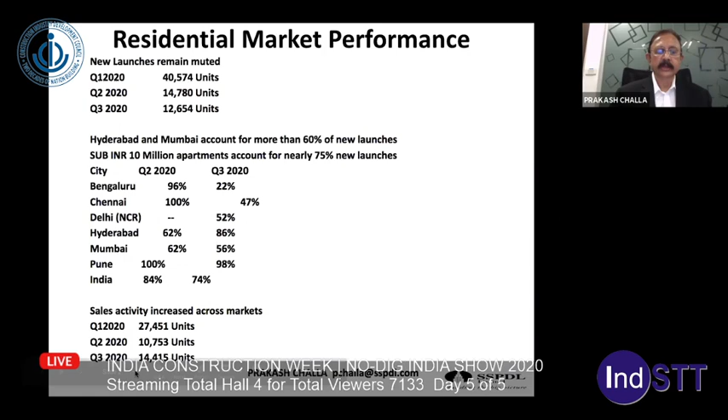The entire real estate space in the country has moved on from the office market, generating a lot of jobs. So when you look at Q1 of 2020, it was around 8.62 million square foot which got absorbed. Q2 was a dampener because just then the entire lockdown was introduced, and subsequently Q3 has picked up and it has more or less given a 64% growth rate, which is very interesting.

Now, at the same time, there's a lot of pre-commitment which happened during that period. The pre-commitment was largely to clients in Bengaluru and Hyderabad. Hyderabad is a new place which has completely overtaken the other southern states, and it is inching to the number one position next to Bengaluru. It is very likely to cross over in terms of infrastructure.

Hyderabad is doing superb in the way the entire government has taken it to a different level there. So this is the basic industry where you have a lot of commitments and a lot of pre-commitments going on.

And parallelly, the entire commercial real estate space is also taking a lot of changes now because the work from home rule has come in, with several IT companies now re-imagining their own requirements of office space. But as the latest survey shows, the way the entire markets have revived, they see this as a very short-term measure. Eventually, people need to come back to the offices because of the way it is growing.

Therefore, in today's scenario, CIDC is doing a commendable job by organizing this kind of discussion so that the industry at all levels, the academia, and the government agencies should come forward to find a genuine solution. We would like to discuss what has happened in the last 9 months, what is the impact assessment, and what should be the probable recommendations to come out of it.

As you know, the construction industry in India is the second largest employer after agriculture. It is critical to the country's economic stability and accounts for 8% of the national GDP, employing almost 57.5 million people. Being a core sector, there are numerous industries dependent on construction, which almost contributes 60% of the total investment that takes place in India. That is the reality and the impact on the overall economic scenario in our country. We are a major stakeholder in the national growth.

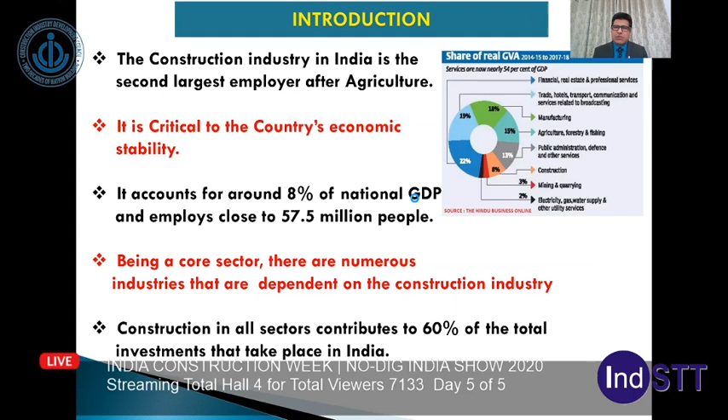As per a KPMG report I found online, roads and bridges, urban infrastructure, railways, and irrigation sectors accounted for more than 64% of the investment from 2008 to 2019. The construction sector, both development and infrastructure, in India was the second largest recipient of FDI, almost 10%, from 2000 to 2019, despite being fragmented.

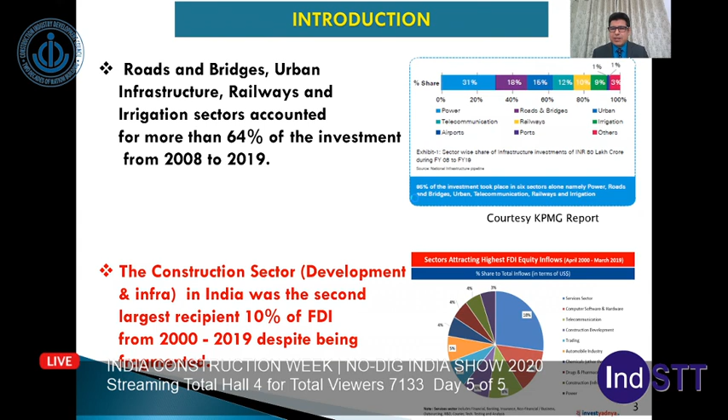So what could be the effect? We are already experiencing these effects of this pandemic on our construction industry. It is expected to face a simultaneous effect on both supply and demand. As the sector is driven largely by infrastructure projects, it is expected to be hit severely by current levels of uncertainty, dismal business and consumer sentiments, loss of income, as well as diversion of government funds towards COVID-19 management. So the next 2 to 3 financial years, as per me, is going to affect this industry significantly.

Low economic activity in other sectors would impact construction services through forward linkages. These are the sectors that feed into construction - chemicals, agriculture, non-metallic products, trade, metal products - and their contribution shows how it is going to affect us, as shown on the slide.

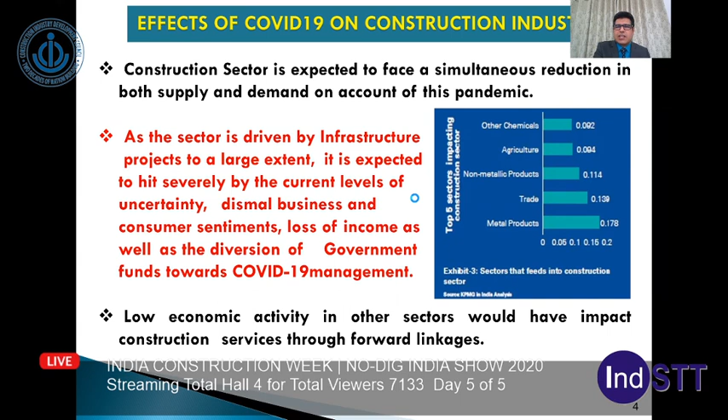A fall in output of construction would have a multiplier effect. It is a force multiplier, a multiplier effect through backward linkage, causing further shrinking of overall economic activity.

This pandemic is expected to hit labor-intensive sectors particularly hard. In the construction industry alone, migrant workers comprise a large part of the workforce and typically stay at the construction site. We all know what happened in April and May, when mass migration took place from the workplace to their native places.

It was a very horrific scene and incident that had taken place at that time. The lockdown imposed due to COVID-19, and its extension from time to time, led to reverse migration of workers, leaving cities and going back to their homes.

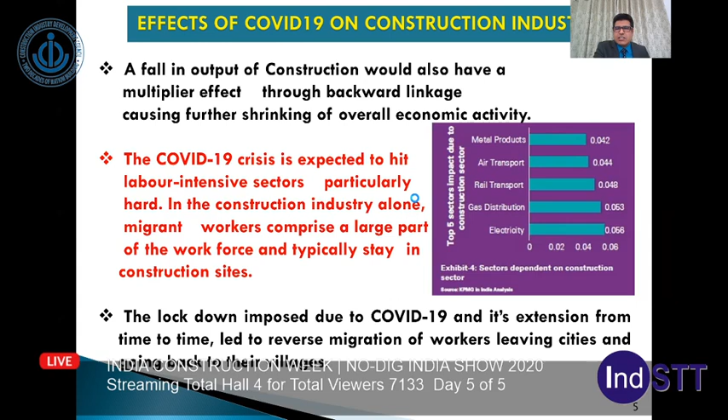These are a few photographs. You will remember that, as per reports, approximately 6 lakh workers just walked from one place to another, to their native place, and around 10 lakh workers were in relief camps at that time. These are the horrific photographs from then.

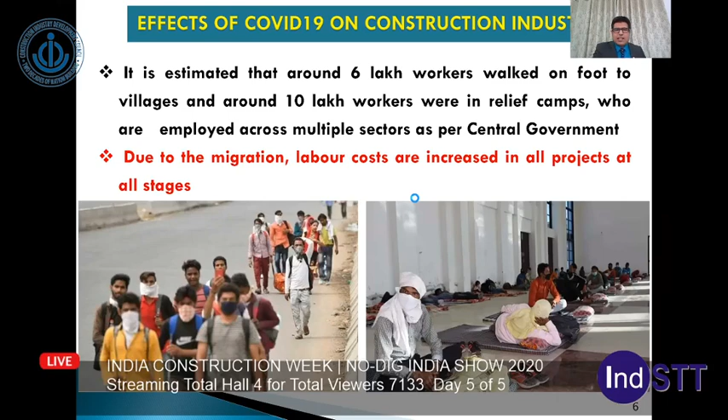Now, if you see the impact that can be assessed due to this, COVID-19 is having a massive impact on construction projects, but the legal implications vary from country to country and from contract to contract.

On the contractual side, much focus is now being given to the wording of standard forms such as FIDIC and NEC. Under-developed projects are going to be worst affected, with a minimum impact of 3 to 6 months.

As you know, all construction projects came to a halt till July and August. Though the lockdown was lifted, where were the labor force, those who used to work at site? Overall there was a shortage of labor at that time, and therefore the construction industry was severely affected by this pandemic.

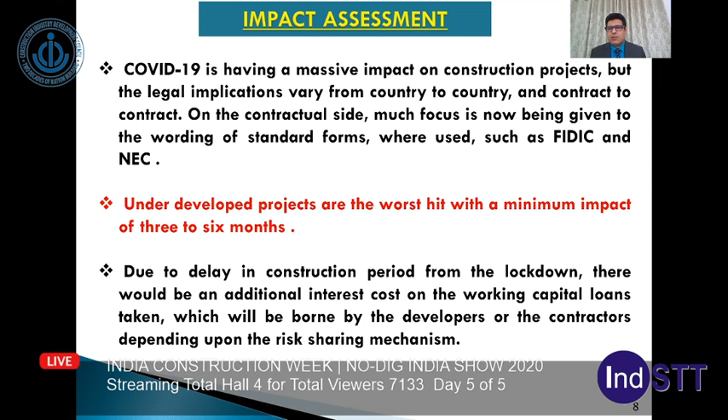Due to delay in the construction period from lockdown, there would be an additional interest cost on the working capital loans taken by different construction agencies, which will be borne by the developers or contractors, depending upon the risk sharing mechanism.

Revised standard operating procedures, duly incorporating social distancing, personal protective equipment, and hygiene, would be required to be adopted at project cost, and that is going to be added to the project cost. We have to implement this as per the guidelines of the Ministry of Health and Family Welfare, and these will have a cascading effect on our construction cost.

Projects dependent on specialized equipment, electronics, and specialized materials are more likely to be hit by disruptions. Implementation cost may not vary much for linear projects like irrigation canals, pipelines, transmission lines, roads, etc. This is my personal view. They may be affected, but not as much as multi-story building construction projects.

Contractually, events such as the COVID-19 pandemic generally engage contractual provisions concerning the consequences of unforeseen events. These provisions commonly fall into two broad categories: force majeure, and contractual provisions for restrictions in material entry and personnel entry to site, or unavoidable cost incurred due to change of law.

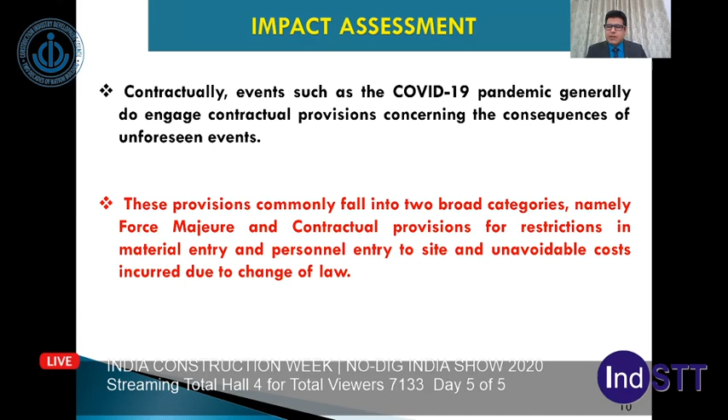Now, what would be the recommendation in such a scenario where this pandemic has already severely hit the construction industry?

As per me, when I was going through this, I found there are so many recommendations, so many papers written on this topic.

One very interesting study I could find on the internet says the effect can broadly be divided into three parts: short term, which is 1 to 2 months; medium term, between 3 to 6 months; and long term, which is more than 6 months.

There are different stakeholders who can take action as per these recommendations and suggestions: government, owner and developer, and EPC contractor. If you see what government can take as short-term measures, that is to release part retention money as applicable.

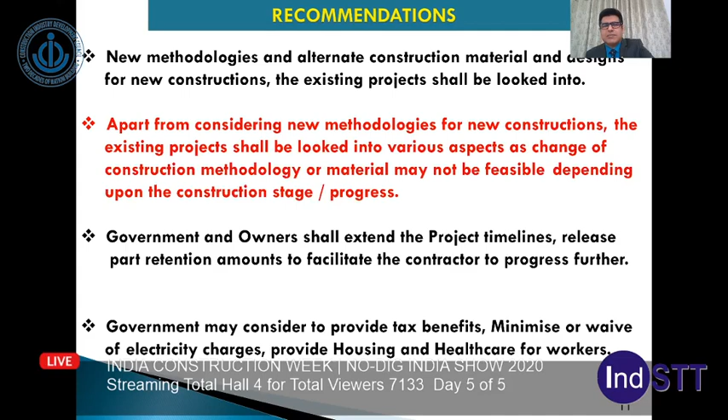Government and owner shall extend the project timelines, release part of the retention amount as we discussed. Owners and developers should implement the guidelines issued by the government from time to time, with joint replanning, contractor and vendor guidelines on facilities for workers, and appoint a rapid response team. All stakeholders of the construction industry shall focus on different and new innovative construction technologies and methodologies.

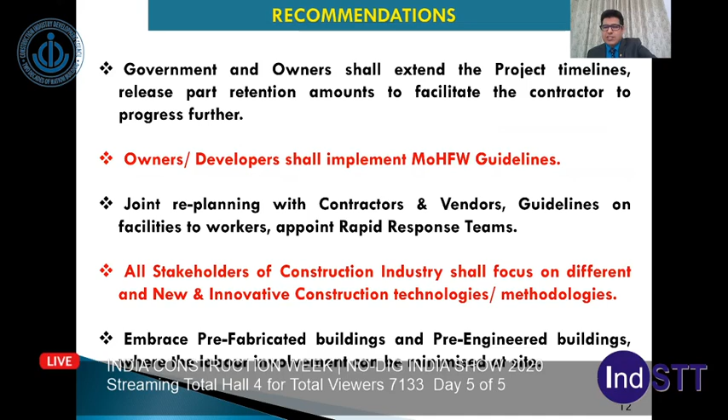We can embrace prefabricated buildings, pre-engineered buildings, where labor involvement can be minimized at site, with flexible working times for workers round the clock in shifts. These are being implemented after work at different construction sites has already resumed, so these kinds of flexible working times are being implemented already at site.

Design and implement a risk management framework to provide early warnings. Now, CPWD has adopted 3 new technologies validated by BMTPC: monolithic concrete construction, EPS core panel system, and light gauge steel framed structure. This is very important. We are going to discuss this in more detail because these constructions are less labor oriented and intensive, and will be much faster, eco-friendly, and quality construction. These are also useful in the present scenario, and we must look into that.

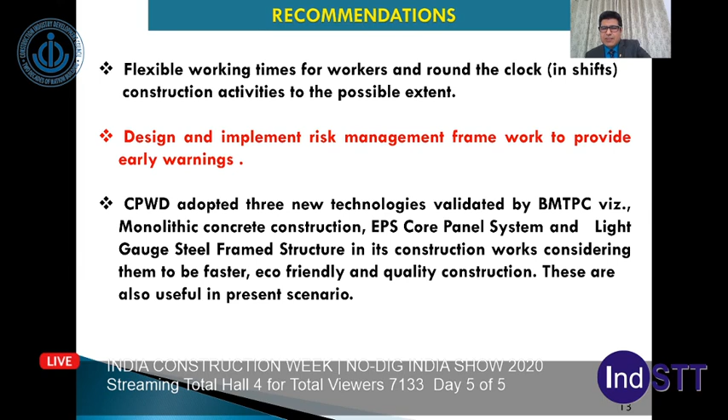Now, if you see, these are the precast elements of a building: beam, column, even the panel for the roof, they are also being used. They are fabricated at a fabrication site at well-developed workshops, and these are transported to site, and it's more machinery oriented than labor oriented. So these kinds of precast and pre-engineered structures are to be given more priority and importance.

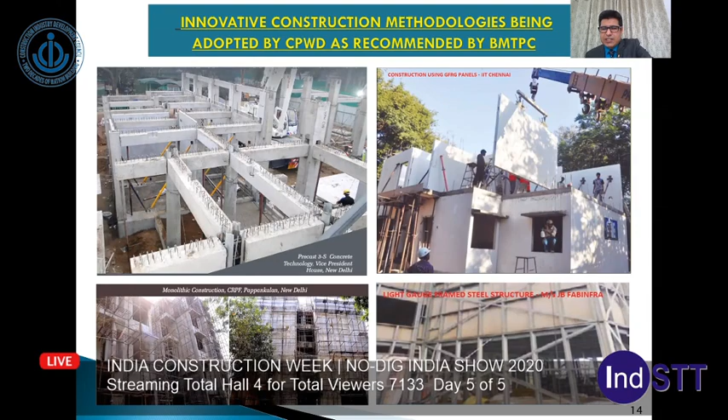Pre-engineered buildings can be preferred for their economy, faster construction, and less work time at site, for all industrial buildings. There are other construction techniques. I'll talk about hybrid construction technology, in which conventional, precast, and pre-engineered, all 3 technologies can be used.

We can go for a conventional foundation system. The beams and columns can be composite elements, meaning we can use a column with MS circular hollow tubes where reinforcement can be welded prior as per the design, and the concreting can be done at site. So this hybrid type of construction technology, using foundation as conventional, and beam, columns and slabs with pre-engineered, precast, or composite construction - all these three elements can be dovetailed in a project. It will be faster, though on the economy side we have to see.

We have to see whether it is at par with the RCC framed structure, because we have done an analysis. If it is a little costlier at the time of construction, 5 to 6%, in the long run it is going to be economical so far as maintenance is concerned. But what is the requirement of the day is labor, so it's less labor intensive, and different types of cranes, equipment, and technology will be utilized. It is more intensive to that and less intensive to labor, which is going to be a big problem in years to come.

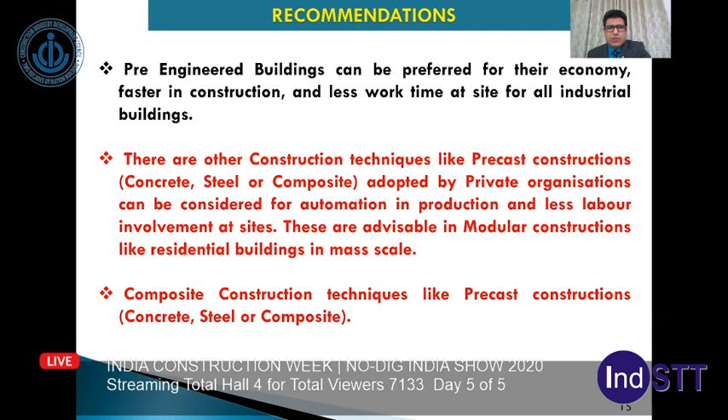Composite construction techniques like precast construction, concrete, steel, or composite can be looked into. Now, this kind of construction is already happening.

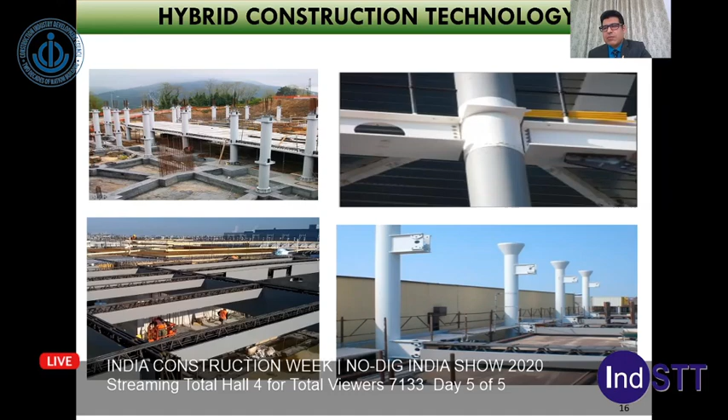beams which can be casted monolithically as part of composite construction - beams, column, and slab. Slab can be precast, hollow, or solid slab also.

Now, the hybrid construction technology - we have got fully self-supporting, quick and easy placing, increased safety because of less manpower orientation, narrow sections, long-lasting building, architectural freedom, fire resistance, seismic resistance, regulation certified, and savings in fixed cost.

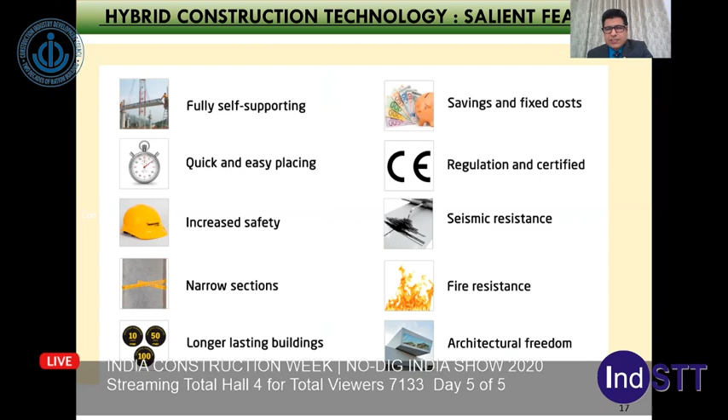So these are the advantages when we resort to such kind of construction in more numbers, more frequency. We are also doing a project in which 11,500 square meter of building, we are planning to construct the superstructure in 30 days of time frame. It is a G+6 building, and we are going to do that.

And what we have envisaged and planned, you can see the different stages - day +5, day +8, and day +28, for a G+6 configuration building of 11,500 square meter. We are planning to do it somewhere in Bangalore in 30 days of time frame.

Thereafter, finishes can be looked into. So overall time frame for this G+6, we have kept around 6 months. But the superstructure is going to be built in just 28 days of time frame.

Once this is made, we can make a project report, and the cost benefit analysis can be done on actual expenditure. So, gentlemen, I have already expressed my views, and these are my personal views, on how the pandemic...

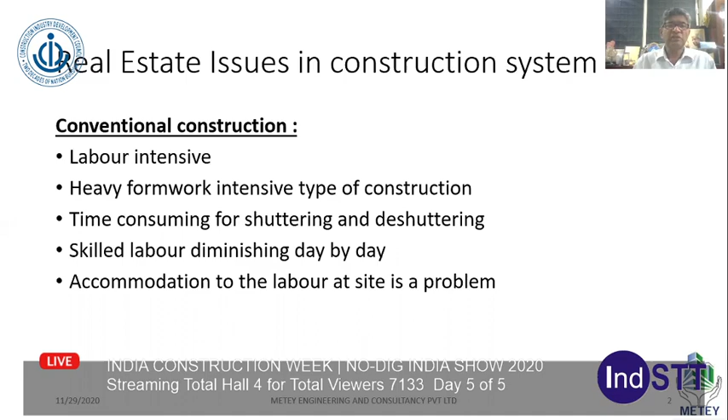Time saving in construction has been happening through advancement in construction technology - in formwork, slip form, jump form, concrete pumping, lifting technology, and various other plant and machinery related to construction field, followed by safety as prime importance. Further advancement in time saving, as well as to meet the non-availability of skilled labor, led to construction technologies.

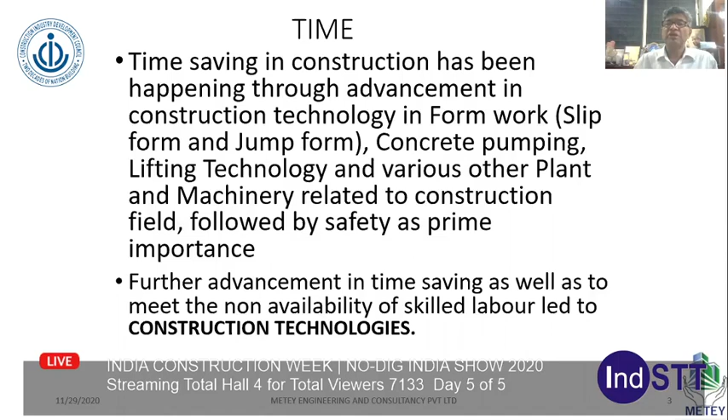Different types of construction technologies for high-rise structures for speedy delivery are: shear wall oblique monolithic construction using aluminum type of shuttering, insulated wall panel construction using shotcreting of concrete, light gauge steel or cold form steel construction, precast and prefabricated construction using concrete and steel, and composite construction.

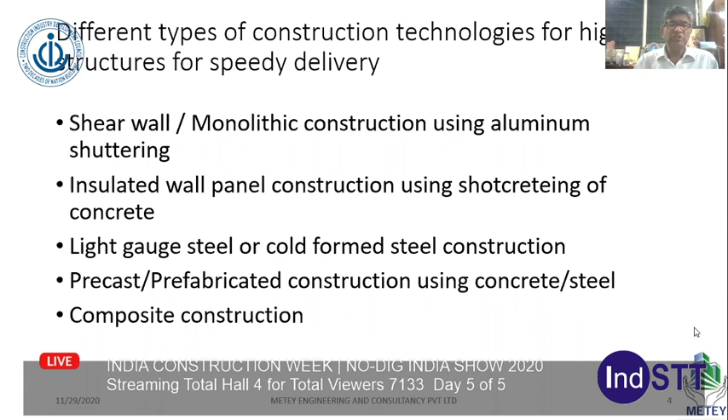Shear wall oblique monolithic construction using aluminum shuttering is such that nowadays about 50% of developers are going for this, such that they can avoid brick construction as another activity, as brick quality is not good, and masons can be reduced.

There's greater advantages, and once you buy the aluminum formwork system, it can be used for 30 or 40 stories easily, and if we handle it carefully, since it won't be rusting, it can be used for generations.

But we need to keep this in mind, by putting some labor in charge, such that the labor will not be throwing and damaging it. Once it gets damaged, cement slurry will leak from the joints of the formwork.

They are predominantly 2 feet wide, 600mm wide, and whatever height we want - 3 meters or 2,900mm. They can also manufacture 300mm wide, 150mm wide also, and taking the plan into consideration, they will give openings, and at the edges, if it needs to be 300 or 150, they will provide it.

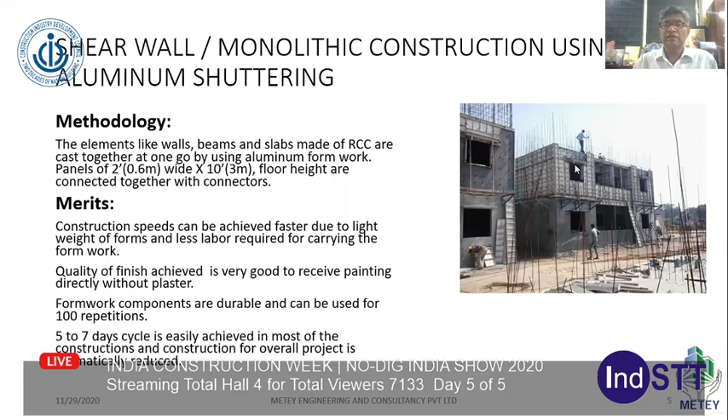Even shuttering for the chajjas also can be cast along with this type of construction. These are buildings built in 2010 for Bangalore Development Authority by Deepak Cables India, who were one of the developers, contractors and developers at the time for this type of LIG, MIG, and HIG buildings.

The cost of formwork at that time was 10,000 per square meter. It has now come down to 8,000 to 8,500 per square meter.

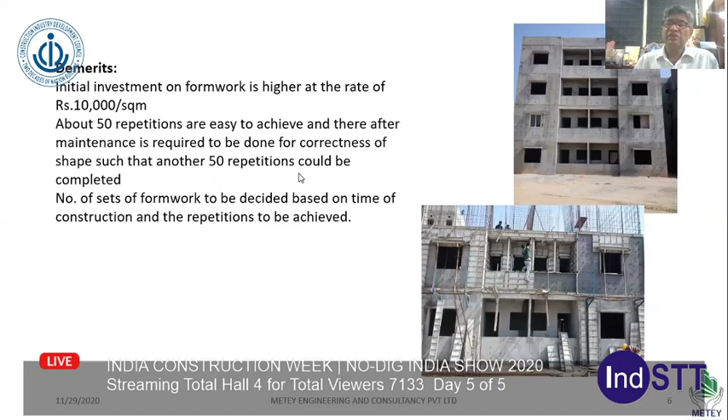This is a beauty, considering the fact that a number of industries have come up in India manufacturing this aluminum type of formwork. Now we have convinced the government of AP to adopt this type of construction rather than going for conventional type, and thereby the government has released tenders calling for construction only in monolithic type of construction using aluminum formwork.

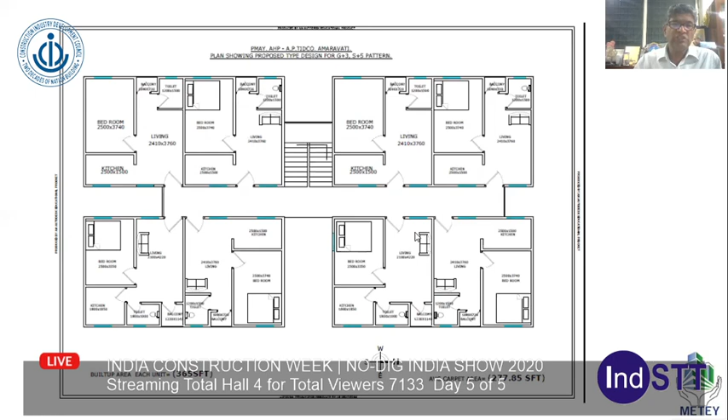The type of EWS units they have adapted is 300 SFT with 1 bedroom, living, kitchen, 1 toilet and 1 balcony to dry clothes and other things. 4 units on one side, 4 on the other, followed by staircase. There's only G+3 units, it does not have a lift.

But where they have provided 365 SFT, we have gone for 6 units on one side, 6 units on the other, again G+3 building, 1 staircase is sufficient. But where we have gone for 12 units per floor, like 4, 2, 2, 4, 6, 6 plus 2, 12 in one floor, we have provided 2 staircases and provision for a lift also.

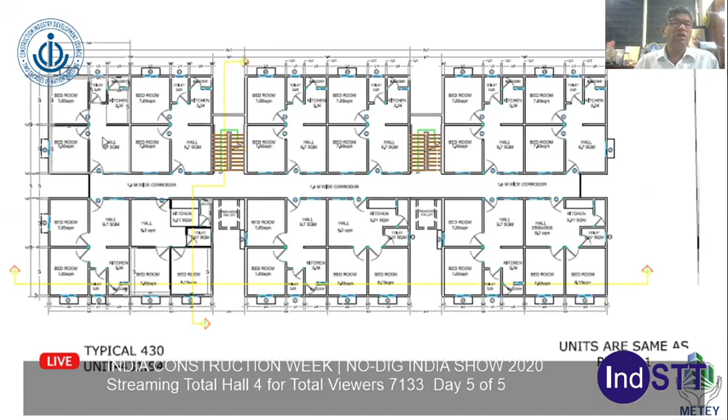These are 430 SFT, 2 bedroom units with hall, kitchen, toilet and a small balcony for drying. So you can see these beautiful buildings, and the reason why we convinced the government is clear.

When we are constructing with this concrete wall construction, there are 120 thick walls with single layer reinforcement, and they are pretty strong enough against earthquake and all that.

Being concrete walls, they will not crack and will not get moisture ingress into the wall, unlike brick walls where brick quality is poor due to contractors, and plastering also does not give much protection. Water ingresses into the building, and people end up leaving the buildings within 2 to 3 years of occupation because they can't be maintained.

So with these buildings, no maintenance is required, and the paint system that we have adapted will last for 5 years.

Vitrified flooring is adapted into the flooring system, and tiles are provided in the bathroom and kitchen, 2 feet high. A beautiful polished Shahabad stone is provided on top as the kitchen platform.

That's how the buildings are. You can see the beautiful buildings and beautiful locations, even in Vijayanagaram, just adjacent to a big hill in a pollution-free atmosphere, where people live in fantastic surroundings.

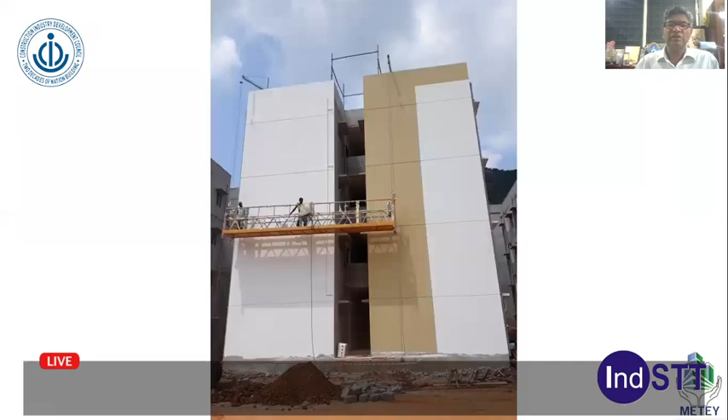Even in Amaravati, the capital of Andhra Pradesh, buildings are coming up in a big way, built by KMV as well as Nagarjuna Construction, L&T, and even Shapoorji are building in Gunturu, Vijayawada, and around East Godavari and West Godavari districts.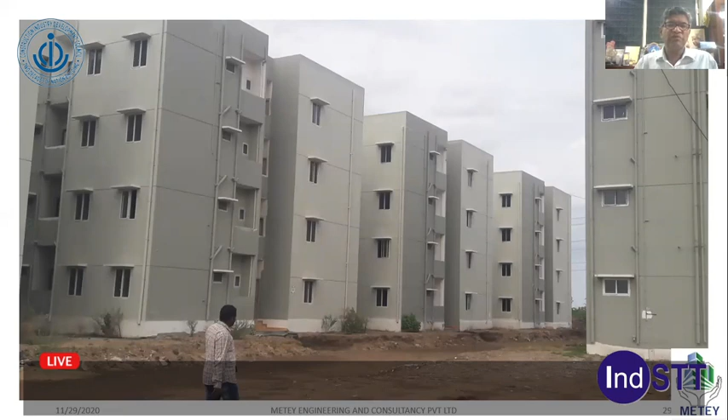This is how beautiful different types of paint systems are adapted with different coloring options. Now the next type of construction is insulated wall construction using Shotcrete.

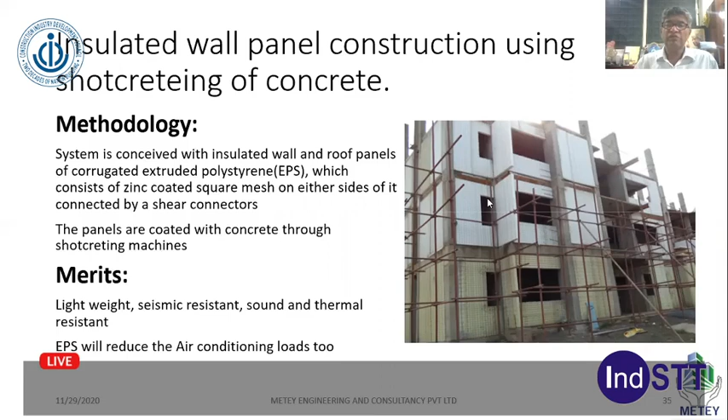This is being adapted for a 12-story building also, for RCC wall and even steel type of construction with steel columns and steel beams. EPS with both side mesh reinforcement is used, and then shotcreting is used as a shear wall system for a 12-story construction.

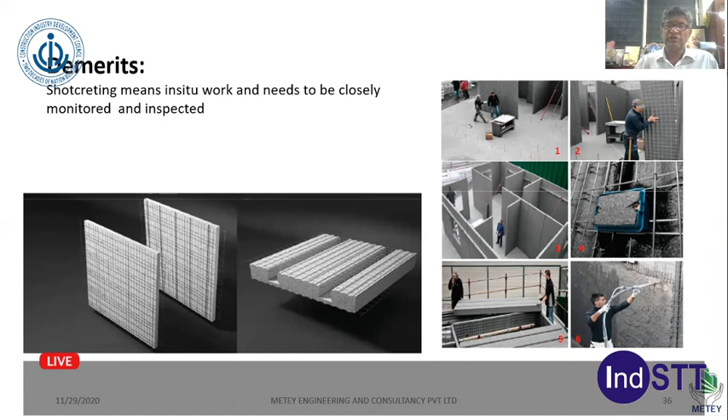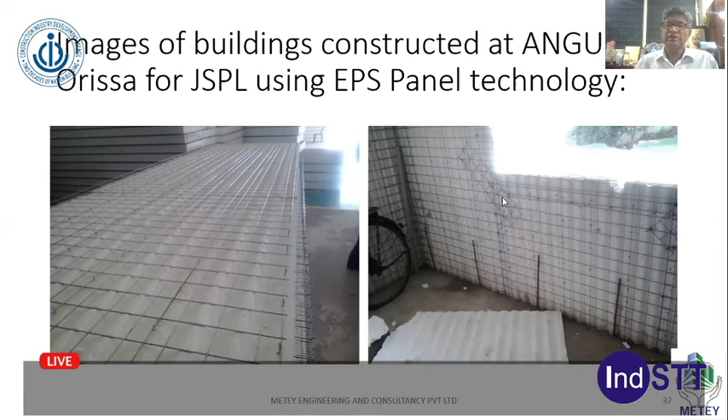We have designed that along with Geodesic, who are the main constructor for the project. We can see here the buildings where the wall system is prefabricated using a machine, with wall reinforcement using a 3 to 4 mm wire, and dowels coming from the bottom.

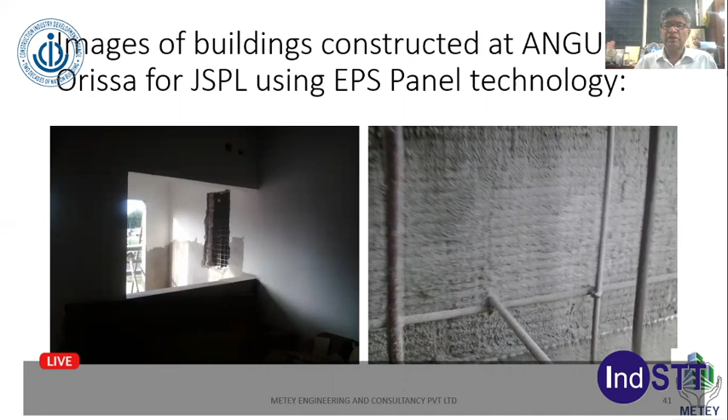They'll be merged in like this and shotcreted, and once you go through, the shotcreting is done masonry style and then rendered to have a smooth surface. On the top level they can pour concrete with no need of formwork, and the system must sustain.

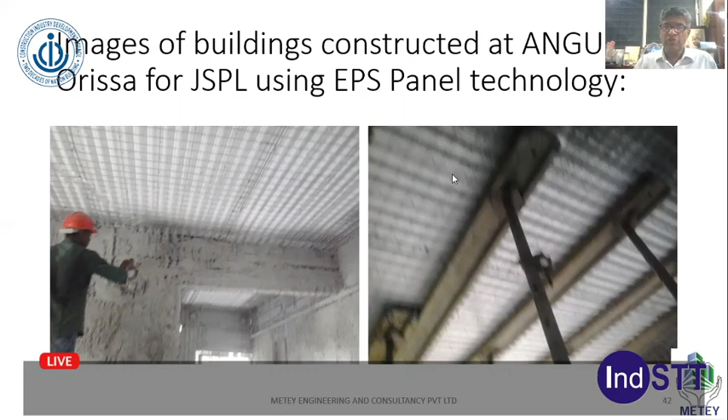After that they will remove it from the bottom and do the shotcreting to the slab also. You can see some of these buildings which are being shotcreted right up to the top 2 floors, and then they can do the shotcreting to that as well.

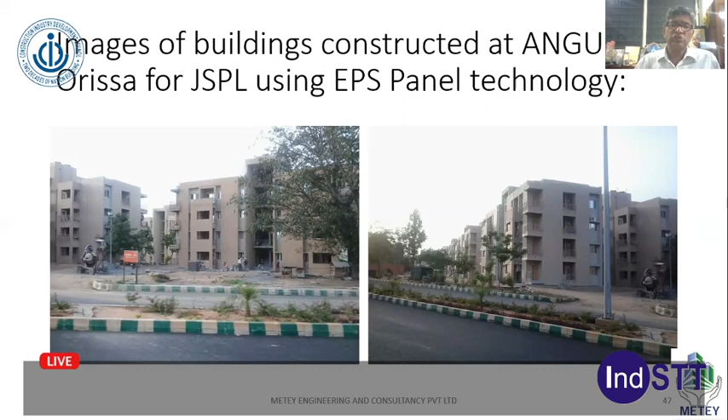The completed buildings look fantastic, and it will have a temperature reduction of about 4 degrees centigrade. This is what Jindal Steel and Power used at Angul, Orissa for their staff housing construction system, with 4-story buildings being used there.

And even for the fisheries community, Housing Corporation of Andhra Pradesh have adopted the same system. Next type of construction is light gauge steel.

It is totally dry form, dry wall construction system, no curing needed. We use 0.7 to 2 mm channel sections, and provide wall panels on either side made of cement panel boards or other available systems, with rock wool inside, which gives fire resistance as well as sound insulation.

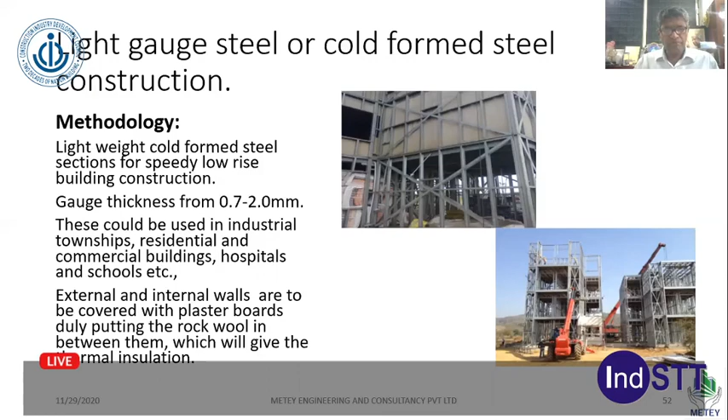They have constructed a 4-story building for their staff at Raigarh, which is part of Chhattisgarh state. You can see that on top of an existing guest house, they have built the light gauge steel construction, and when completed, it looks fantastic.

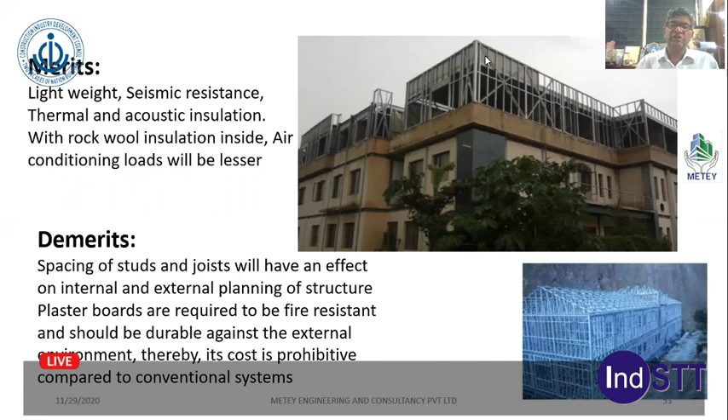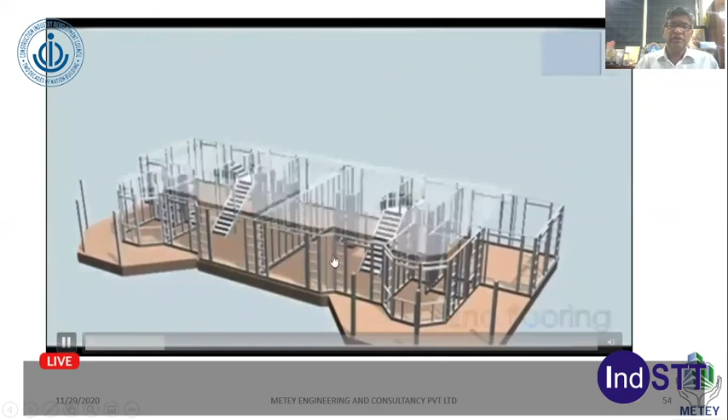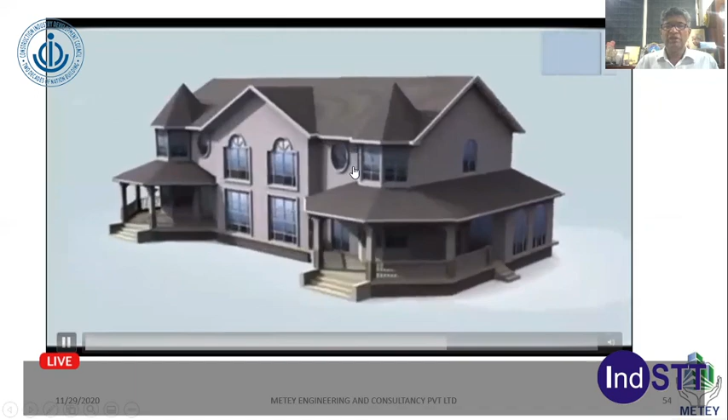Even hospitals are being built this way. This is one type of system. There is a small video which I will run briefly - this is how the framing system comes directly and gets attached. Then they put the staircases and the slab system for the concrete. Later, whatever type you want, they put the boards - entirely drywall boards provided there, no concrete, nothing. That's the beauty of the system.

So moving on to composite construction - this is steel frame, steel columns, steel beams. On top, you can use precast concrete slabs or deck slab construction and pour concrete. The steel columns are encased in concrete, which gives corrosion protection as well as fire protection. For the beams, you apply intumescent paint or other cement-based paints in a vermiculite system, which protects from corrosion as well as fire.

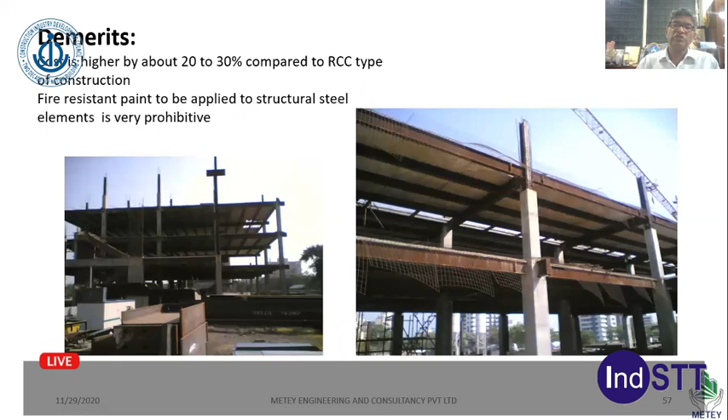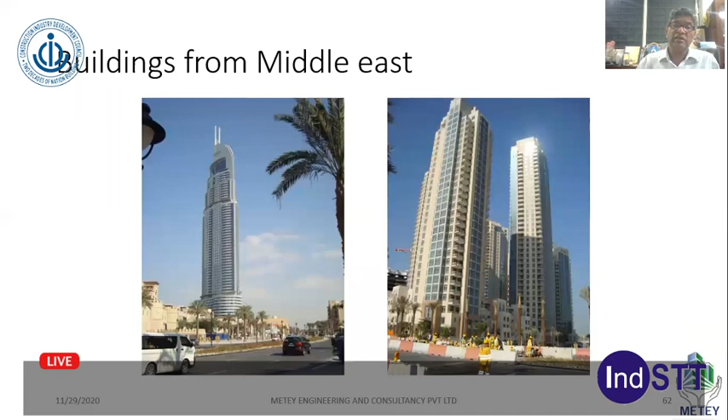Apart from that, we can also go for precast systems, whereas in conventional construction heavy formwork is required and there's congestion. In precast, there's no such formwork - elements come from the factory and get erected. Even abroad in Dubai, where I worked for 10 years, they use the facade type also with precast systems. This is how structures are wonderfully mushrooming using precast.

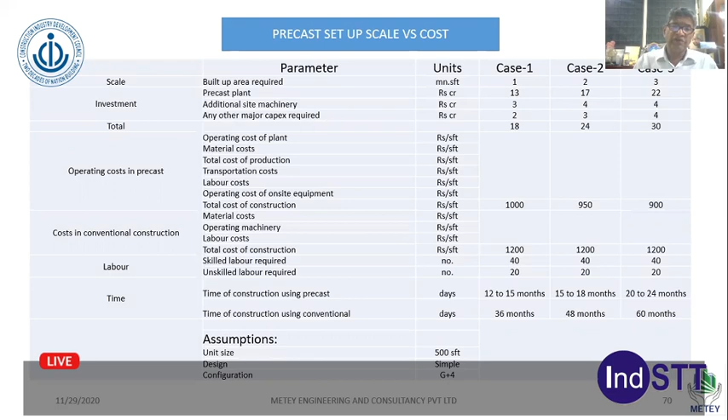So all developers can move on to precast construction or composite construction, which will save time. This table was developed by me sometime in 2010, considering a 500 SFT area for a G+4 building, and this needs to be updated for present-day costing.

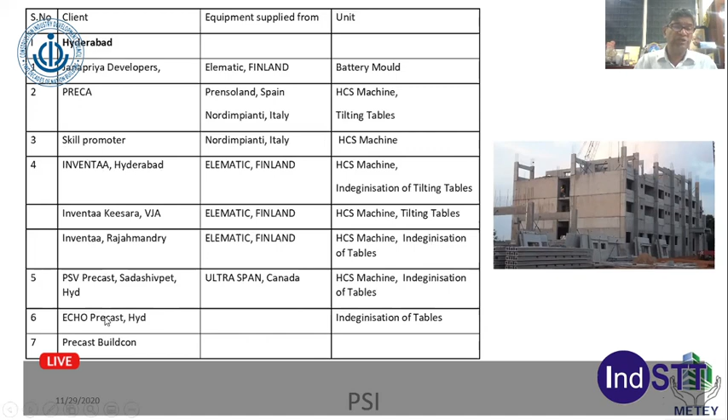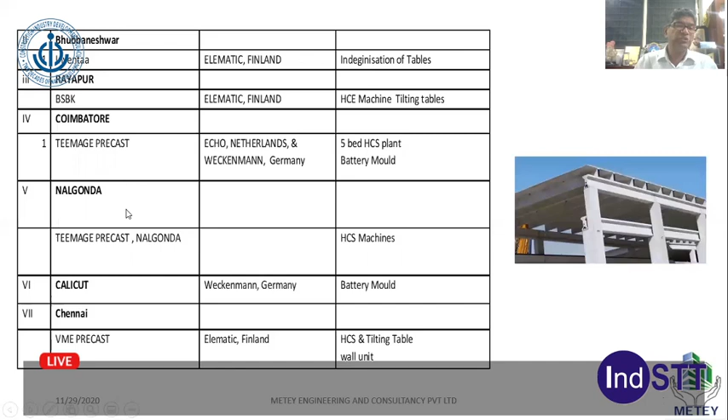PSV Precast is there in Hyderabad - they've taken machines from Canada. ECHO Precast have also done work for GHMC Dundigal, where Inventaa, PSV Precast and ECHO Precast have constructed 11-story precast buildings. At Bhubaneswar, Inventaa is there. In Raipur, BSBK are doing wonderful structures. In Coimbatore, Teemage is doing it, and Nalgonda has also set up recently.

Calicut, Chennai VME are doing wonderful structures. Pune, Best, and IBL, Mumbai, L&T have done one. Bangalore's Gauri Infrastructure have used more of these methods to construct structures. Shapoorji Pallonji have been doing it at Bangalore, and they have done one wonderful structure, setting up a carousel system.

Noida Supertech is the only full-fledged system. There is another factory also. B G Shirke has been there since a long time. Bharat Developers have done one wonderful structure using tilting table HCS machines.

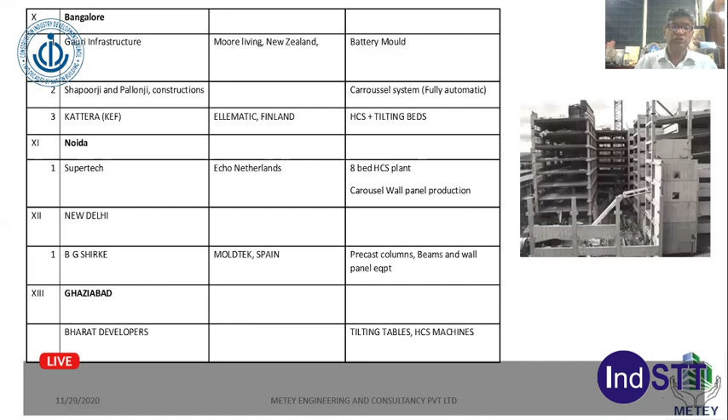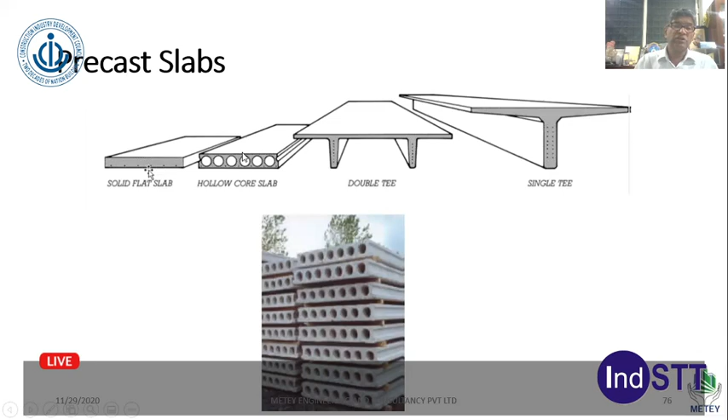In precast slabs, which is the beauty in the system, there's solid flat slab, hollow core slab, double T, single T. By using hollow core slab, the formwork can be avoided. Precast beams are also possible, and you can use 3-story precast columns at a time, saving time in terms of precast construction, along with a precast flooring system.

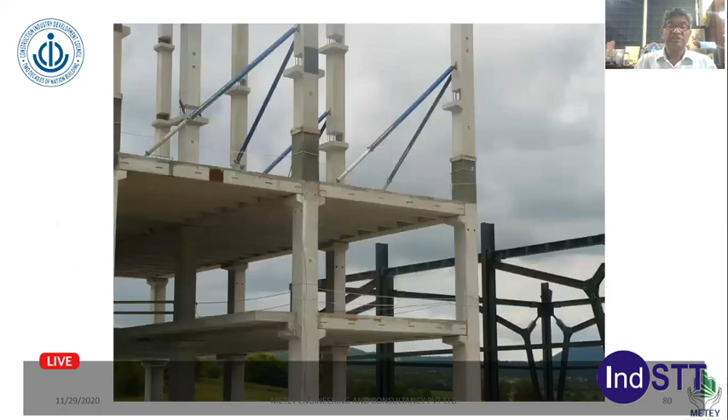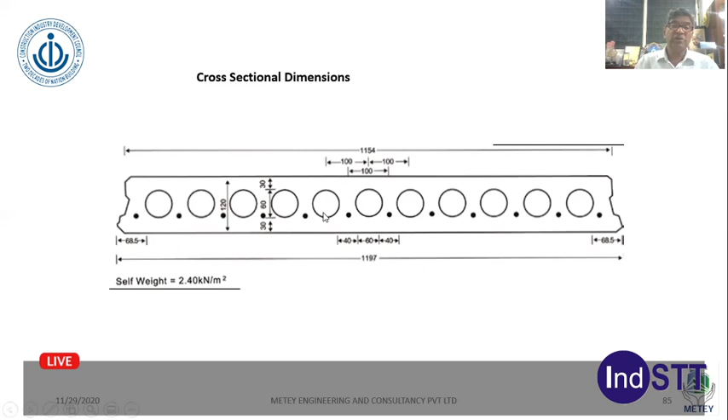Precast hollow core slab looks like this. Openings can also be provided during casting. There are some systems where on steel beams as well as walls, hollow core slabs can be provided.

Prestressed composite slabs, double T slabs is a wonderful system. In hollow core slabs, the standard width is about 1200, whereas in double T slabs you can use about 2400, 2500, 3000, depending on the width. Length can be anything - it can span about 15 to 30 meters.

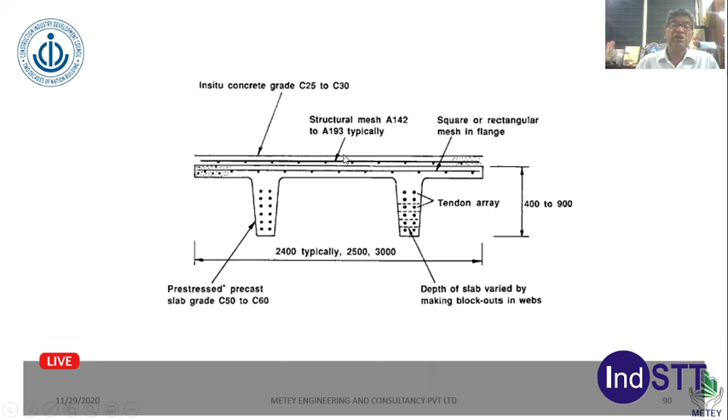That is the beauty - if single T slabs can span 15 to 22 meters, double T spans can span even up to 30 meters, and the depth can vary from 400 to 900. These are the pre-stressing strands. Usually it is initially cast 70 thick, and then the rest of the concrete will be poured after erecting it on the slabs. Now you can see abroad they are carrying a 30-meter slab on the truck, so India also will be poised to do that.

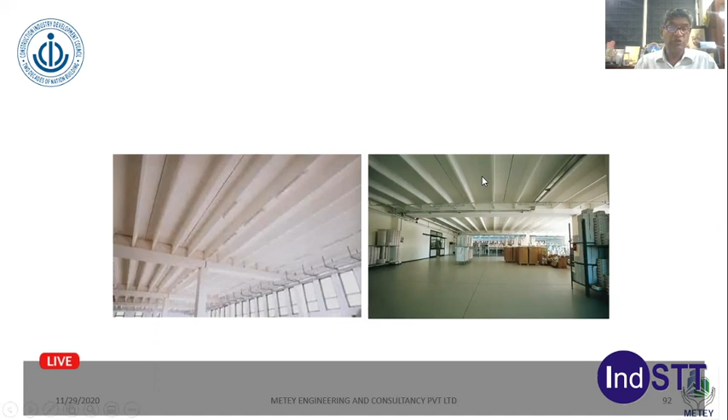You can see the beauty of it in a shopping mall or for parking structures - a column-free structure whereby they can put the racking system wherever they want. Even in India, Precast India Infrastructure in Pune have developed this particular system and supplied it, as well as Precast has also done one structure in Nizam Club for a parking structure.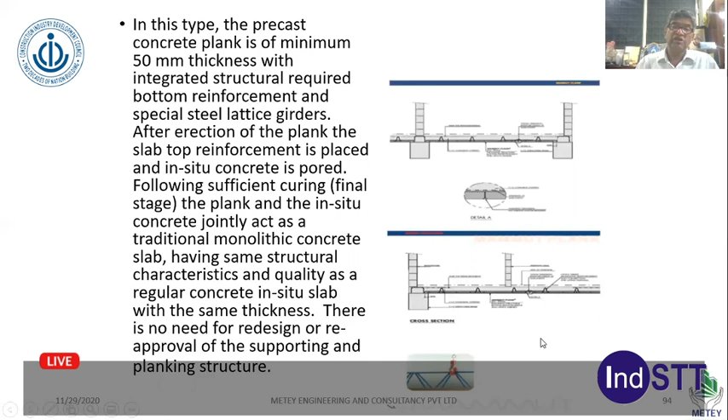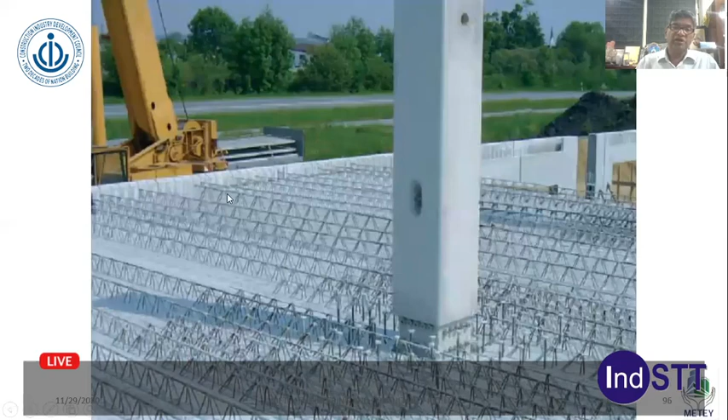So here there's 100% elimination of slab formwork, 100% elimination of soffit plaster work, 50 to 70% reduction of slab propping work. Why 50 to 70%? Because you are going to pour the rest of the concrete - 150 to 200, whatever you require - after erecting them onto that. So it's about 10 meters long, being only 70 mm thick or 100 mm thick, it cannot take the rest of the concrete on top, so they just provide only the beams to take care of the extra concrete.

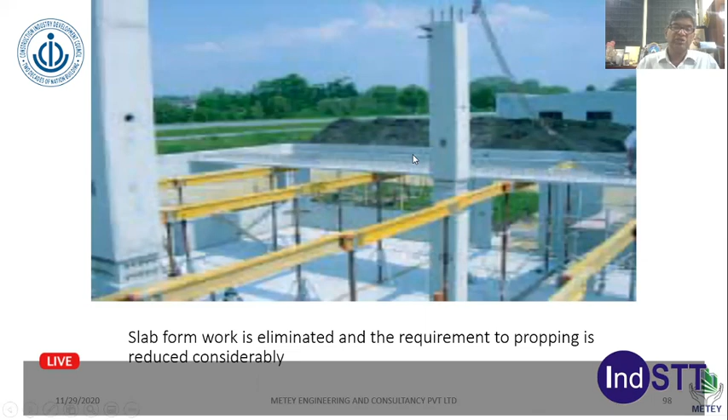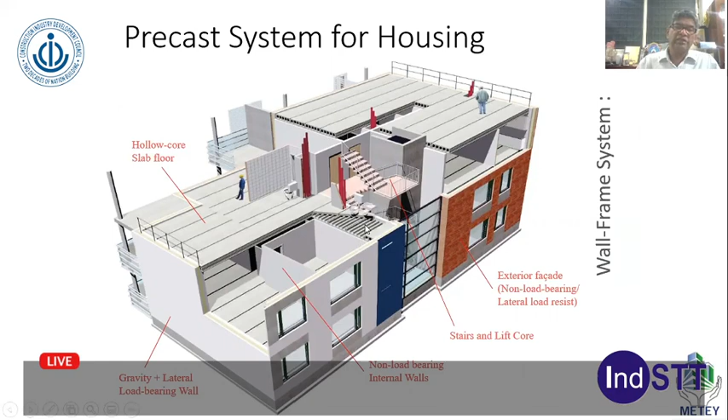If you look at the precast system for housing, you can have precast walls and on top hollow core slabs, and then precast stairs are very simple to do in this system. Precast boundary walls are also very simple to do.

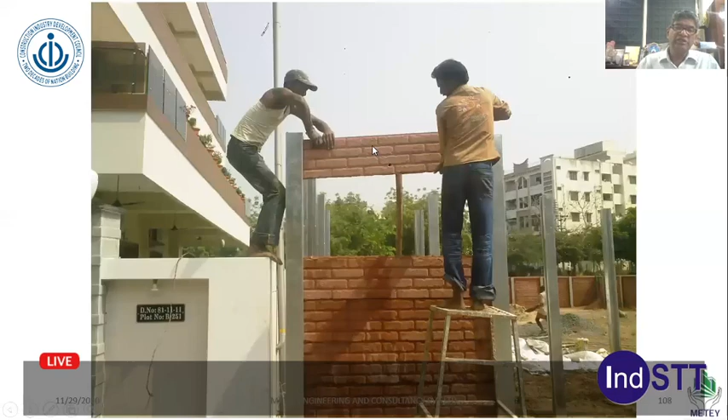This has now come across India, where every 5 feet you can have a precast column type with the insertion of precast systems of about 1 feet element. Every 1 foot element, two laborers can just erect it and slide it in between the precast columns. Precast columns will be dug into the ground by about 3 feet and poured with concrete with a 2 feet diameter into that.

Now you can see that along with the boundary wall, you can also do a structure for servant quarters, even inside of that. So this is going across Andhra as well as across India fantastically.

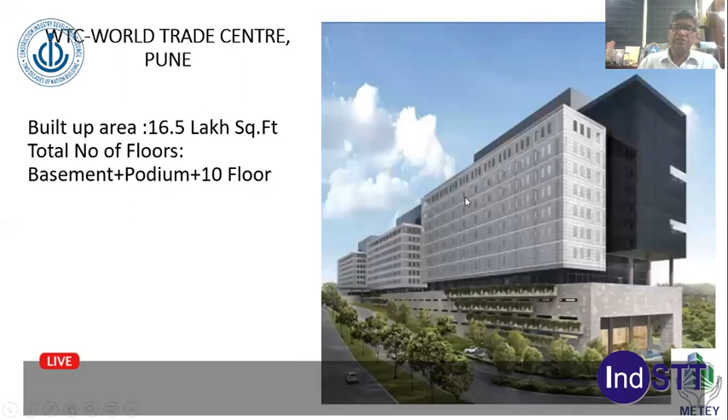Facade elements, colored elements can also be used. Examples in India include some precast buildings - WTC Center in Pune built by Precast India Infrastructure, BD have done one structure, and B plus S plus 18 built by BJ Shirke.

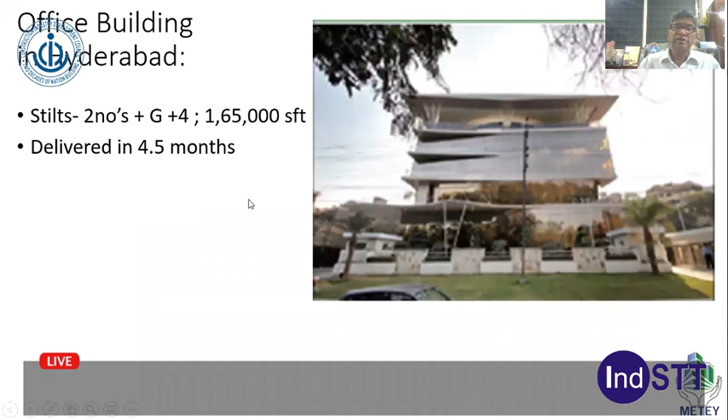An office building of about 1,65,000 square feet built in 4.5 months by Preca. A hospital building of 1,20,000 square feet built in 4 months by Preca. An industrial building in Hyderabad, the Cadbury's project, 2,20,000 square feet delivered in 5 months.

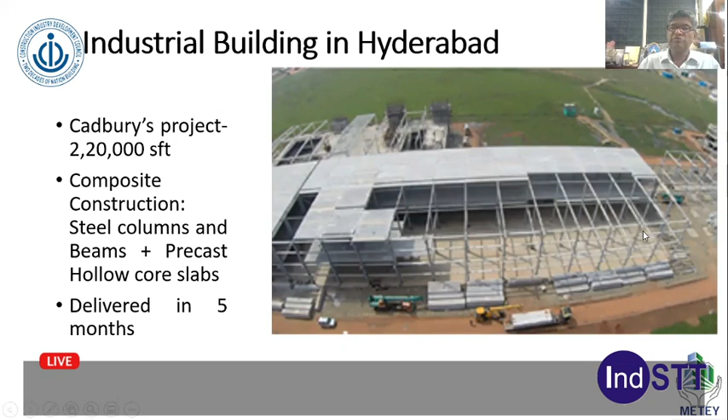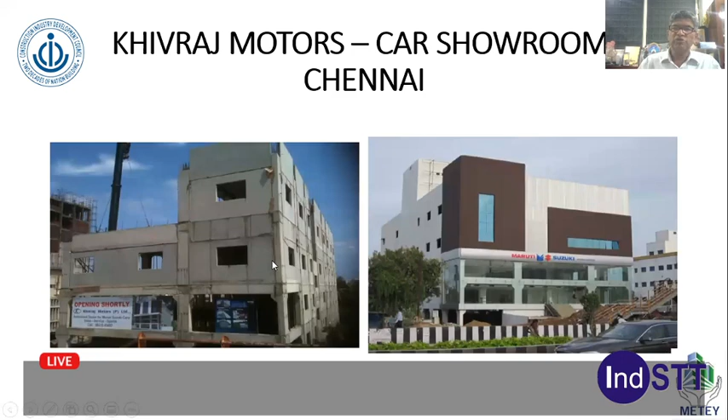I think they have delivered only the precast slabs here. VME Group Chennai is doing wonderful precast structures. For DRDO CABS in Bangalore, they have delivered one structure. Novotel Hotel is built by VME Chennai. Khivraj Motors Car Showroom is built in Chennai by VME. Office building in Guindy, Chennai built by VME.

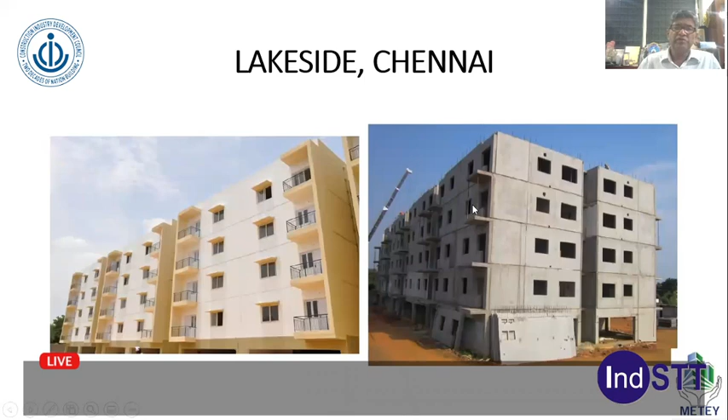Lakeside Chennai is again built by VME. Team Ace Coimbatore is doing well. Initially, they built their own building. Later on, they built a canteen block in about 38 days, 13,500 square feet.

Rotary School Tirupur built in 28 days for 90,000 square feet, again by them. SCM Skill Tirupur, Tamil Nadu built in 30 days for 52,000 square feet by them. Christian Medical College, Vellore, Tamil Nadu built in 27 days, built up area of about 50,000 square feet. Jindal Student Housing is built by Jindal for 85,000 square feet, built in 2 months, is a beauty by them.

Now, built in 2 months means all these precast slabs, precast element erection is done prior to that. That is not taken into account in the 2 months. That's what you have to remember. The 6-story building was simply erected in 2 months.